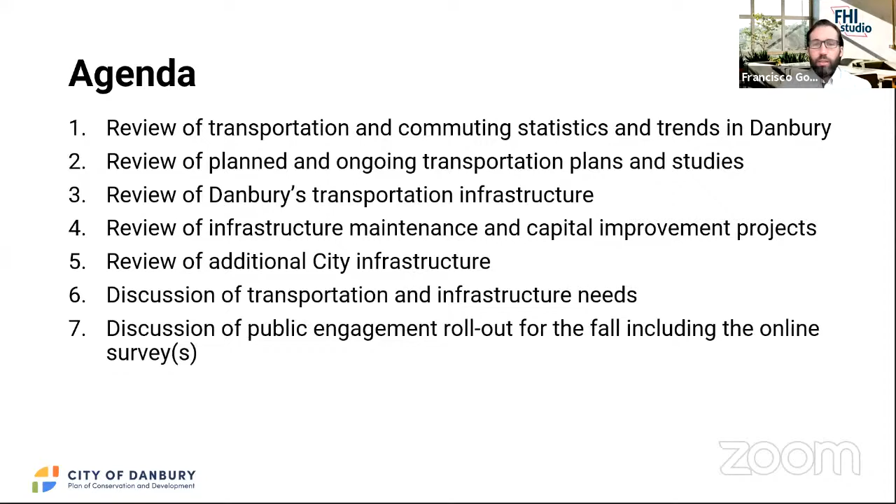And then Marcy will give us a brief overview of our thoughts about rolling out the public engagement campaign for this fall. All right, with that said, I'd like to turn it over to Parker now. The floor is yours. You'll excuse me if I chime in from time to time to make a comment I think should be added to the conversation, but it's yours. No worries, thank you Francisco.

So first, we want to take a look at very high level trends in traffic in Danbury. This is data from the American Community Survey, a U.S. Census product. Really big picture, 75% of residents drive to work, another 15% are carpooling. A big takeaway, I'm sure we're all aware of this, the roadway network in Danbury is very important, as well as the automobile. Only 4% use public transportation and only 2% walk to work.

How will COVID impact the commuting trends? You see the work-at-home slice that might increase, but that might be something we take a look at into the future.

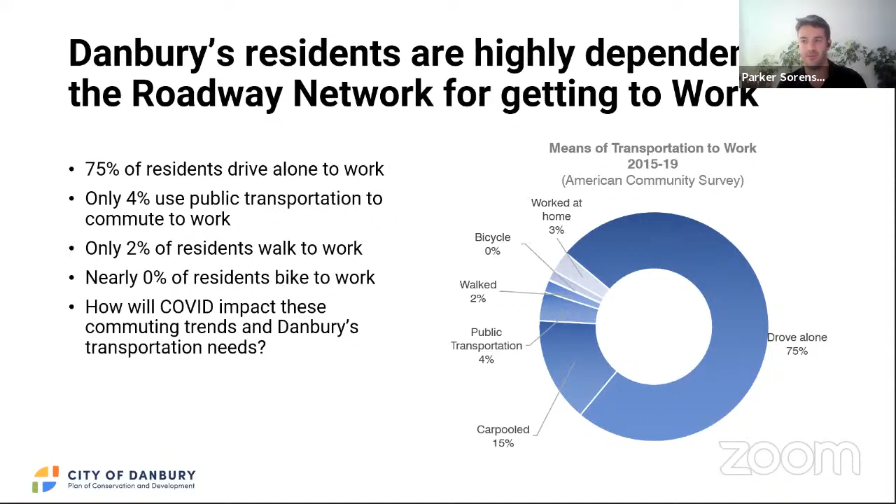We took a look at trends at select locations. These are tube counts or traffic counts that the Connecticut Department of Transportation conducts from time to time, usually every 3 years, in various locations in the city.

We took 12 locations throughout the city and 12 interchange ramp locations. Shown in blue are the non-highway locations, and you'll see that that's dipped a little bit, but been relatively stable since 2004. I just want to point out that that really mirrors a trend we see for a lot of similar communities around the state. I-84 traffic in Danbury has remained stable over that time.

We just want to point out what has changed since 2004, 2007. Navigation apps have popped up and allow people to avoid heavily trafficked routes that they might have otherwise been on before these navigation apps were prevalent. So these are really the major corridors in Danbury, shown on the blue line.

To add to what Parker was saying, just taking a look at the blue line would suggest that traffic is decreasing in Danbury. This is just an index, and what this data tells us is that it has decreased at those 12 locations.

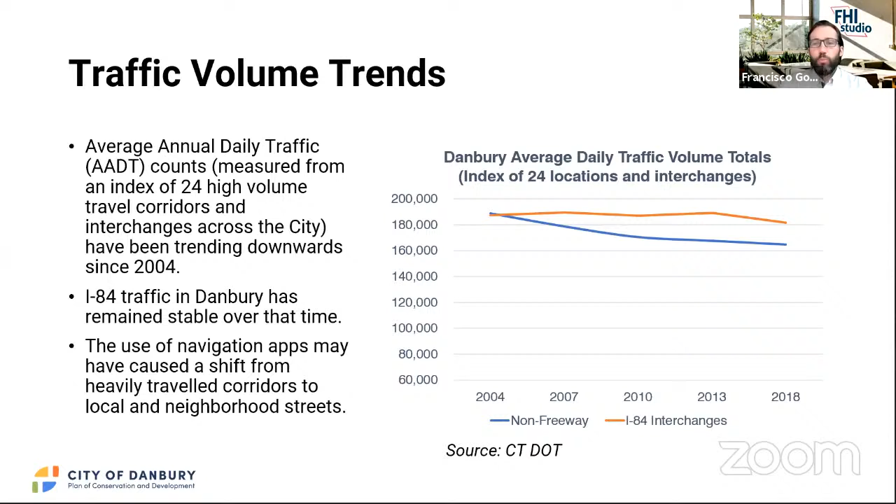I think what this graph is telling us, if anything, is that traffic in Danbury has remained probably pretty stable since 2004. It may have shifted around, and it may have shifted in time of day with more pronounced peaks, but you most likely haven't had an increase in volume throughout the city in aggregate over that period of time, even though the perception might be otherwise.

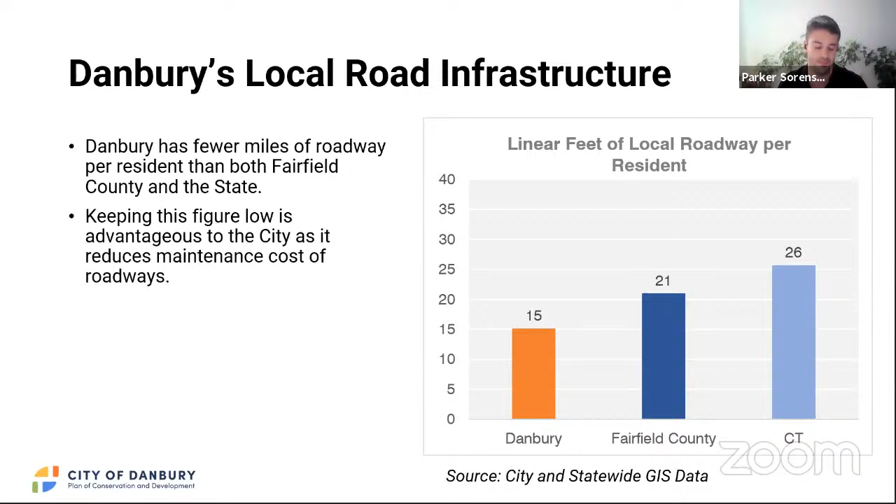We just want to note this - Francisco is going to talk more about the capital side later in this presentation. But obviously, keeping this lower number is advantageous to keeping costs lower for city residents. There might be, say, private roadways that were built over time for specific developments. Obviously, if the city starts to bring some of those under public ownership, that will impact this number in the upward direction, and have an impact on infrastructure budgets.

We took a look at safety between 2012 and 2020. About 3,000 incidents per year on average. Just a few highlights: around 2015, a couple things happened - you see this big increase. There was a change in the reporting system used by the state, so that is some of the increase. But we also want to note, in the mid 2010s, smartphones became really prevalent as well, so you see somewhat of an increase in general between 2013 and 2016.

In 2020, there's a sharp decrease. We all experienced this - less traffic resulted in less crashes.

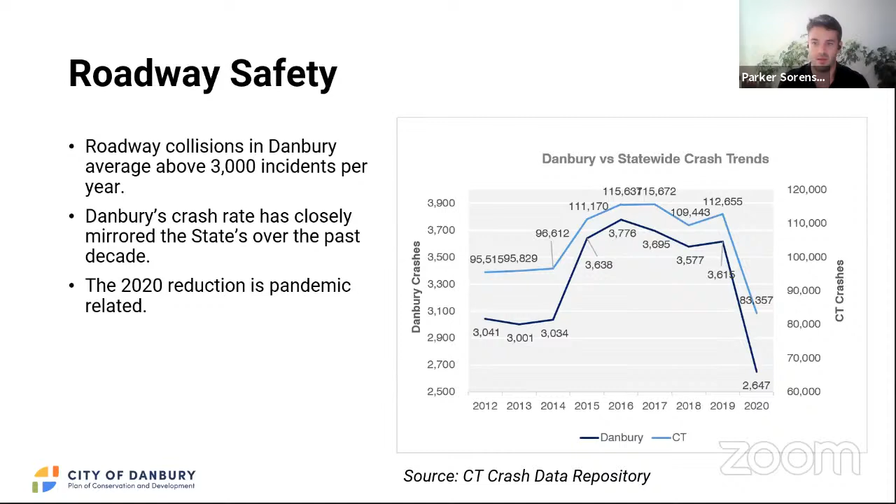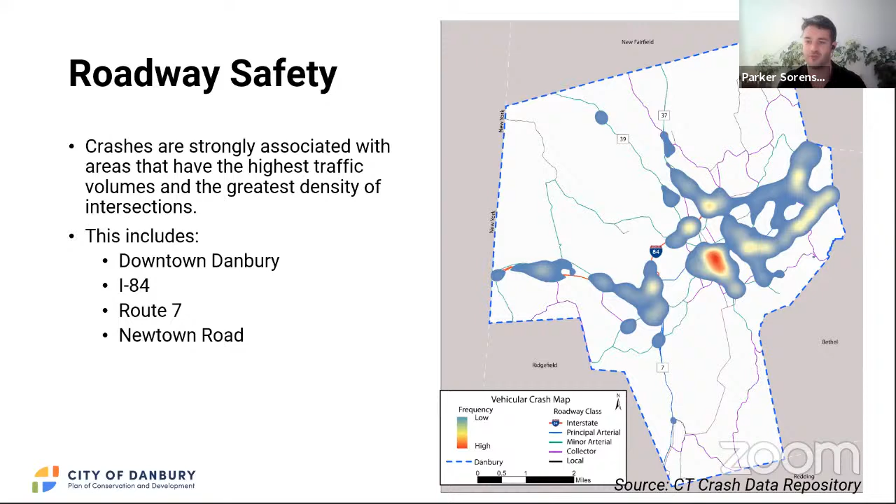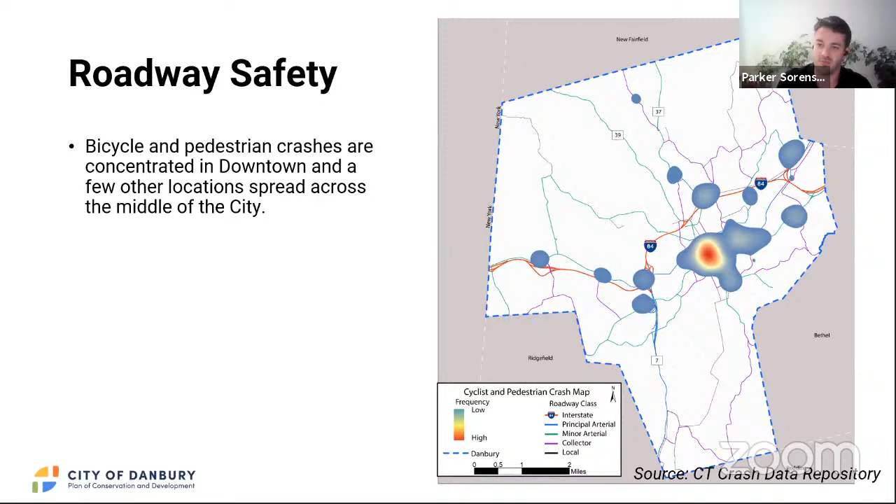The next slide shows specifically bicycle and pedestrian crashes. Those are really concentrated downtown. Not surprisingly, that's where our pedestrian activity is - that's where people are crossing the road, and that's where we're seeing the crashes.

So generally speaking, those are some of the trends we see in the state and national data sources. I want to take a look at the transportation plans and studies that we found relevant to this plan in the city of Danbury.

WestCog, the Regional Transportation Planning Agency, completed a regional safety plan in 2020, which included the city of Danbury and all WestCog member towns. At a high level, 3 high crash corridors in Danbury were identified - again, some of those major routes. 9 high crash intersections were identified, as well as specific countermeasures for 5 specific roadways at the bottom. So that's a really good resource that the city can use moving forward.

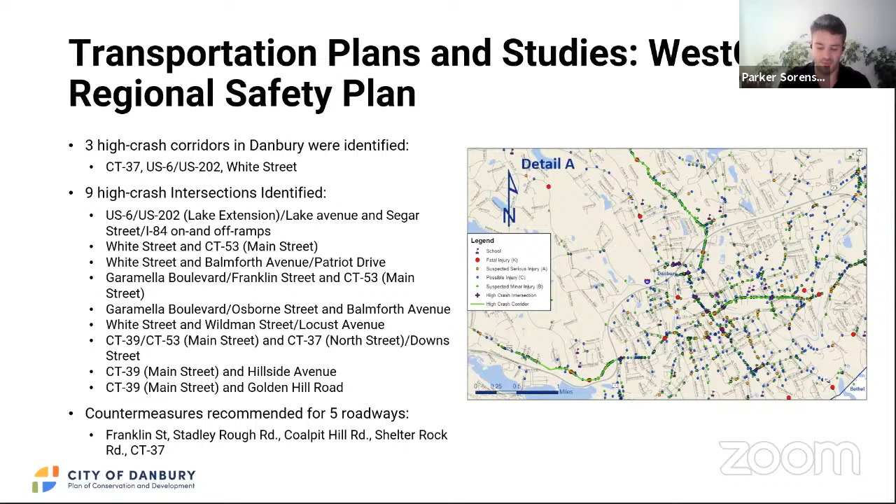I'm sure everyone in this meeting is aware of the I-84 Danbury project, which covers between exit 8 and the New York Connecticut state line.

Reducing some of those left exits, increasing the roadway width to 3 lanes throughout the city of Danbury, but also where possible, improving multimodal connections with commuter parking, bike-ped travel, especially under and over the highway, and any transit connections where possible. So that's a really major planning project that Marcy mentioned. She's on this call. That is ongoing, and the city should be paying attention to it moving forward.

And given that we have Marcy on the call, Marcy, can you give us just a 1-minute briefing on where the project is at in terms of its overall schedule?

You're on mute. In case you're speaking, you're on mute right now. Okay, maybe Marcy has me muted. All right, we'll keep going. I'm looking for her. I know she was off, probably got bumped out. Oh yeah, she's here. She's here, but okay. Yeah, all right, that's fine. That's fine, we can keep going.

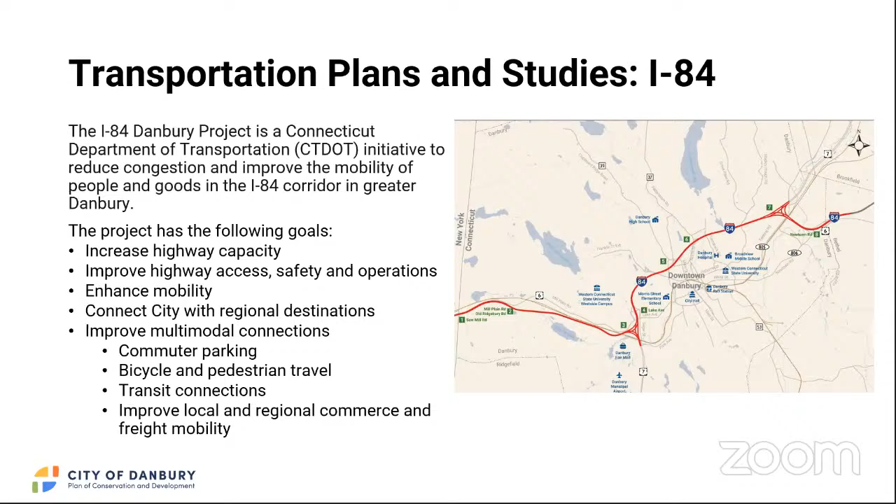Well, let's go to 37 because it's our next slide. And Marcy, seeing as how you're as familiar with the plan as anyone, why don't you give us just the broad overview about what it is?

All right, so Route 37 is a corridor study that goes from 84, the exit ramps at 6, all the way up to New Fairfield Center. The cities of Danbury and the town of New Fairfield came together, and they wanted to look at a couple of different things.

One is how to reduce congestion around certain interchanges, as well as what is the possibility and practicability of building a trail along the reservoir, the Margerie Lake Reservoir. So we looked at all of those things. The draft report is out, posted on the WestCog website.

At this point, all we have left to do to wrap up that study is present to both councils, the city of Danbury as well as the town of New Fairfield, which I expect will happen within the next 30 days. Okay, great, thank you.

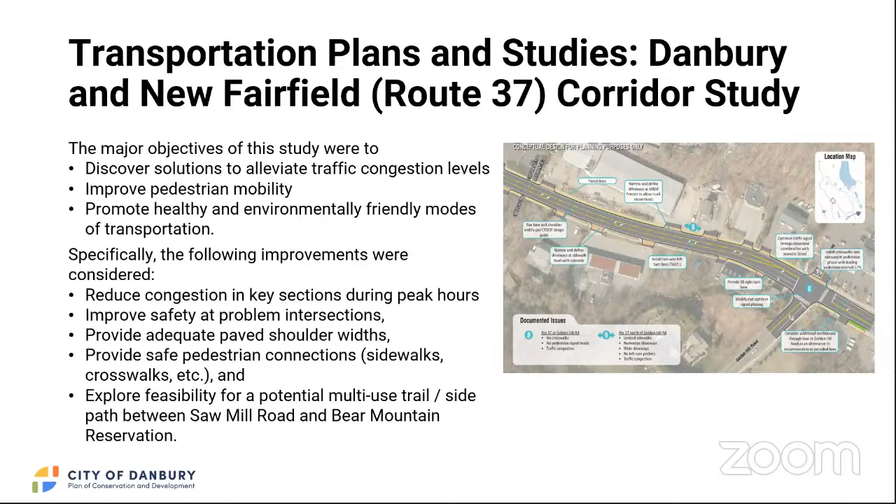And I-84 Danbury will go on for a while, I guess that's the only thing I have to add for that. Yeah, Sharon definitely impressed upon us the long range. And I apologize, I'm actually calling in now because my internet went out. Oh, okay, well, we're glad we didn't totally lose you.

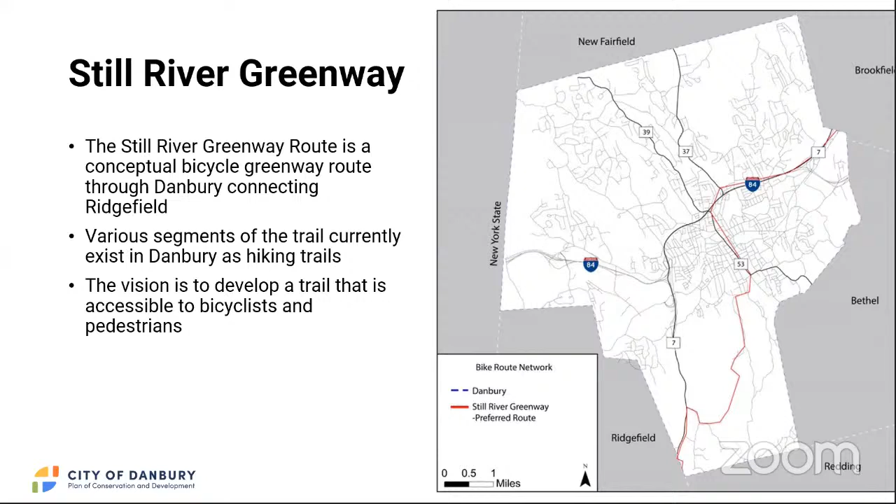Great, thank you, Sharon. Could I just ask a quick question on the previous slide? You had West Street listed. Is that, Lake Street, referring to Lake Avenue and Lake Avenue Extension? Yes, I think it is. It's just a typo. West Street and Lake Avenue Extension. Okay, thanks.

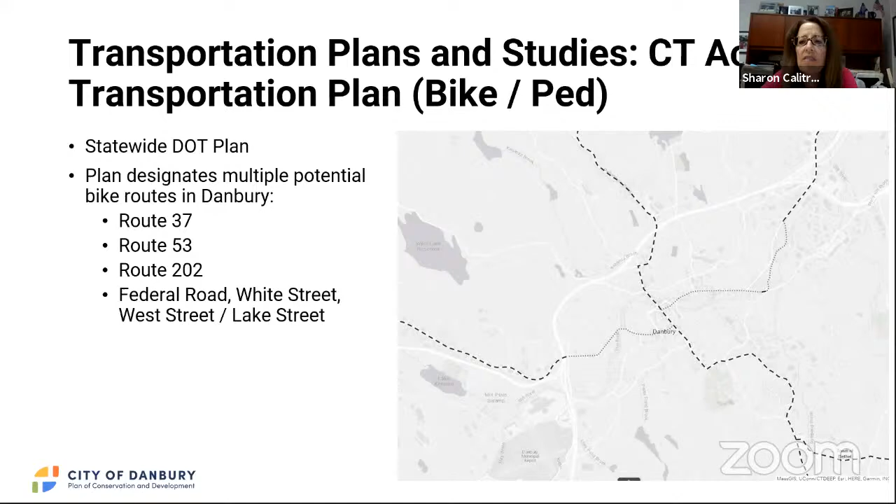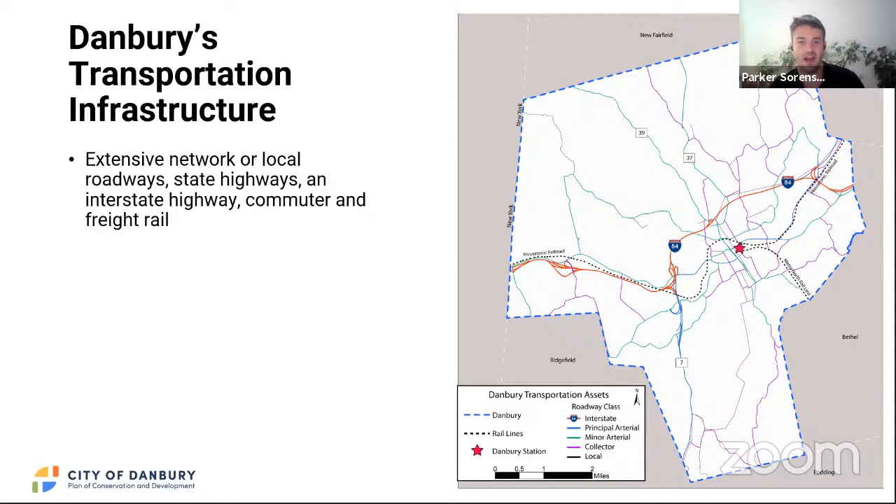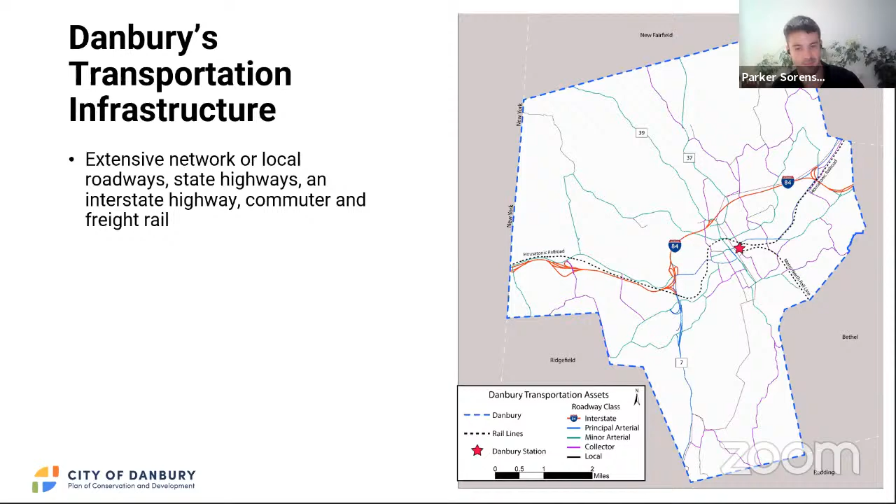Thank you. All right, Parker, back to you. So overall, specifically taking a look at the actual infrastructure that the city of Danbury maintains, there's an extensive network of local roadways, state highways, interstate highways, Route 84, Route 7, as well as commuter and freight rail, specifically commuter rail Metro North. We'll take a look at each of those modes in the next few slides.

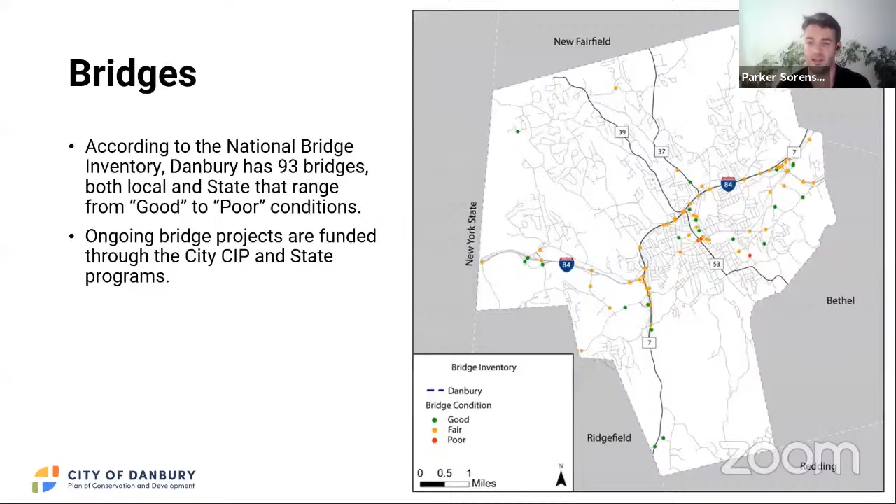Railroads: railroad corridors include the Housatonic Railroad and the Metro North Railroad. Most of us should be familiar with the Metro North branch line service that currently terminates in downtown Danbury, providing service to New York City. I want to note, and this has been in the news a lot recently, there's currently a feasibility study for the potential extension of Metro North service of some sort from New York, Brewster area probably, to the Danbury station. That's just a feasibility study being conducted at this time, and it's ongoing.

Yeah, I'll just jump in for a time frame and frame of reference. As many of you know, this was discussed. We focused heavily on the TOD, the Downtown Danbury TOD plan on transportation, and one of the ideas that came out of that was to promote this east-west connection.

For the railroad, using the old Maybrook line or Housatonic line easement area, NYMTC, the New York Metropolitan Transportation Council, along with Putnam County, funded a feasibility study that we participated in the scoping of, to determine the feasibility and ridership interest and levels.

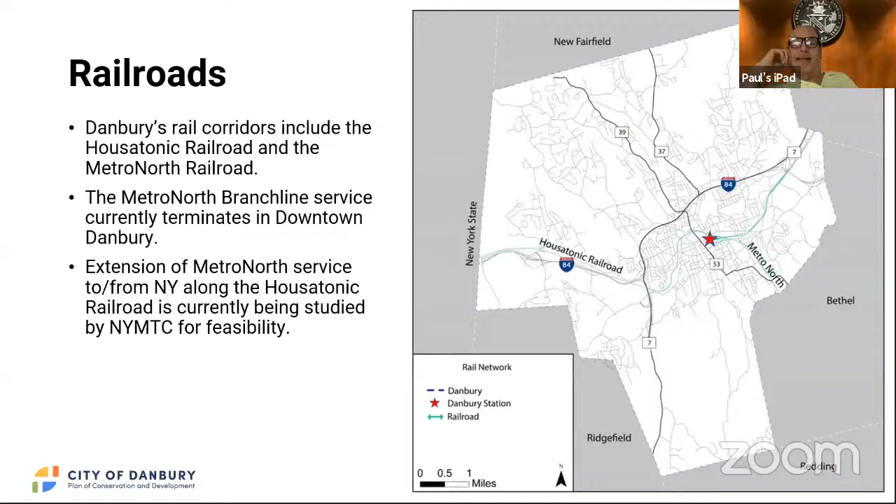They're not touching the existing tracks, but the guys doing this were a little nonplussed that the trail could hold both a bike path and a commuter railroad. But I said, well, I'm sure that they know that. I'm not sure that Danbury knows this. So yeah, we know. I'm passing it along. Okay. Yeah, thank you.

Yeah, we do know, up until the Connecticut line that's been occurring. The discussions with them, I don't want to get off target, we can have offline discussions about this, but they wanted to kind of do the combination, and their concern was people next to their active rail line. So it's something we have to look into.

In a no-train situation, it's a perfect opportunity for a trail. But we want to be able to try to make that connection and provide a trail, whether it's adjacent to it, nearby, excess right of way, that all has to be figured out. But yeah, we're familiar with it. Okay, thank you.

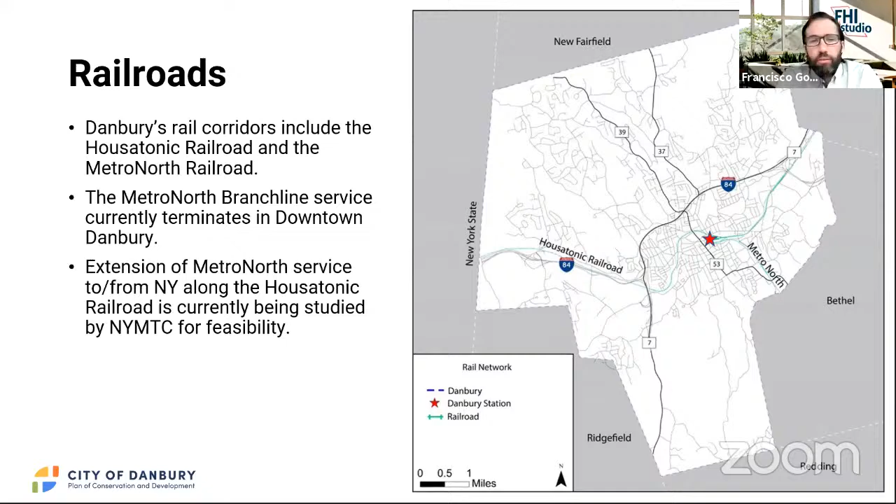Okay, great. Well, let's move on to the next slide, talk about bus transit. So Hart Transit in the city of Danbury operates 7 routes, roughly highlighted to the right, and you can see it's kind of radial from what is called the Pulse Point in downtown Danbury. I'm sure many are aware.

Recently, like other transit systems, the pandemic has had a pretty significant impact on ridership of the HART transit system. However, ridership is expected to rebound. Funding challenges continue to be a challenge moving forward. And the Pulse Point itself, with the 7 routes coming into a single location downtown, there's been ongoing discussions to relocate this Pulse Point closer to the train station to make that multimodal connection a little easier. Definitely an asset we want to keep track of.

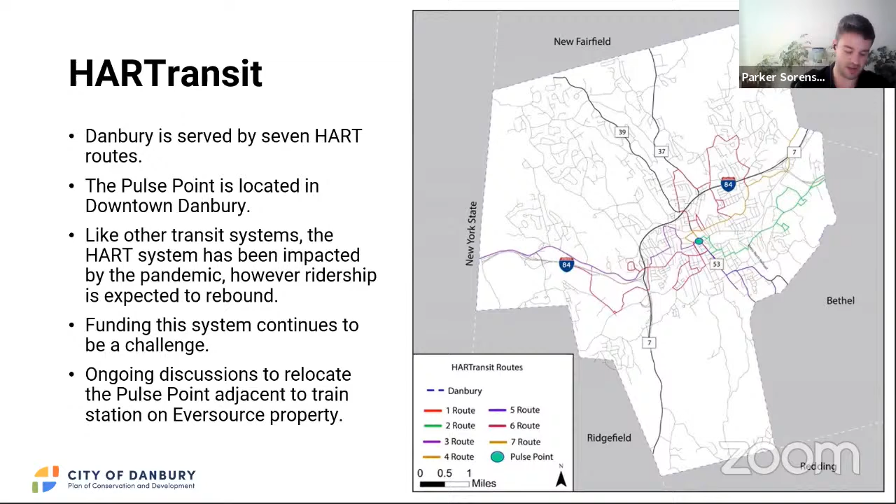Then finally, we want to talk a little bit about bike ped. On the pedestrian side, we have a sidewalk network highlighted in this magenta color. You can see that's really concentrated in downtown Danbury itself, with some significant gaps as you get outside of downtown. Surrounding neighborhoods have little infrastructure at all. However, the city's zoning regulations have been supporting the development of new sidewalks with projects by requiring their construction, etc.

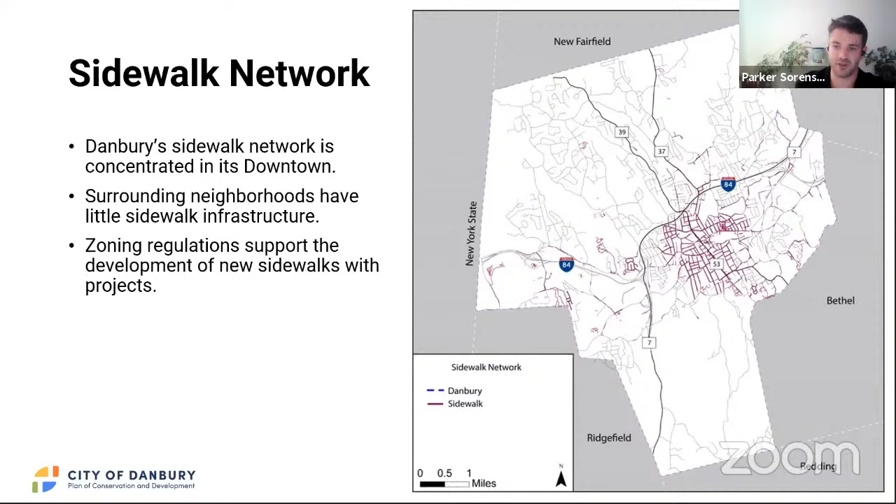Then lastly, bicycle infrastructure within the city. There's very little currently, no bike lanes, shared use paths, etc. However, note that this is the 2012 Greater Danbury Regional Bike Plan. It indicates that the greatest area of bicycling demand is found in the downtown Danbury area, as well as east-west along the I-84 corridor to Bethel, Brookfield, etc. So you'll see that highlighted in the red color. So no biking facilities yet, but definitely something that there might be demand for in the future. Thank you.

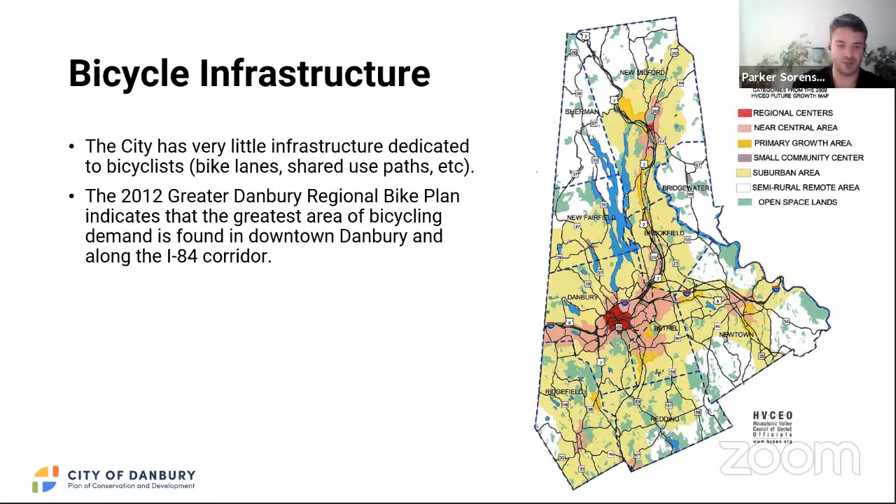All right, I'd like to talk about all of the work that is going on related to transportation infrastructure, whether that be maintenance work or work that is funded through the current capital improvement budget. I've got a bunch of projects here. I'm not going to read them all. We wanted to get them into the presentation so that you could review on your own if you're interested. I think we want to impress upon you, or remind you, of all the work that does go on a year-to-year basis.

By example, we have roadway and sidewalk work with a number of projects that are funded, being planned, or under construction at the moment. There's a wide array here, so I've got 5 or 6 slides to this effect. I'd like to turn it over to Tim Nolan, if you want to talk at all about the kind of work that you folks do on an annual basis, what you're working on now, and what is lined up in the near future.

City of Danbury Public Works Department controls all of the properties owned by the City of Danbury. So we have superintendents that look after facilities, the roadways, the parks, equipment maintenance, the forestry department, and a superintendent that looks after our utilities, both sewer and water, as well as a construction manager superintendent that does major capital improvement projects. So everything owned by the City of Danbury, the Public Works Department maintains.

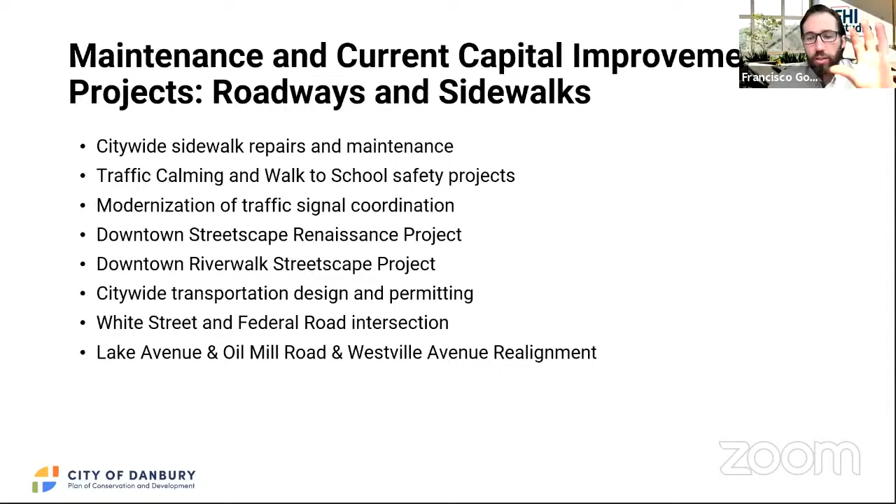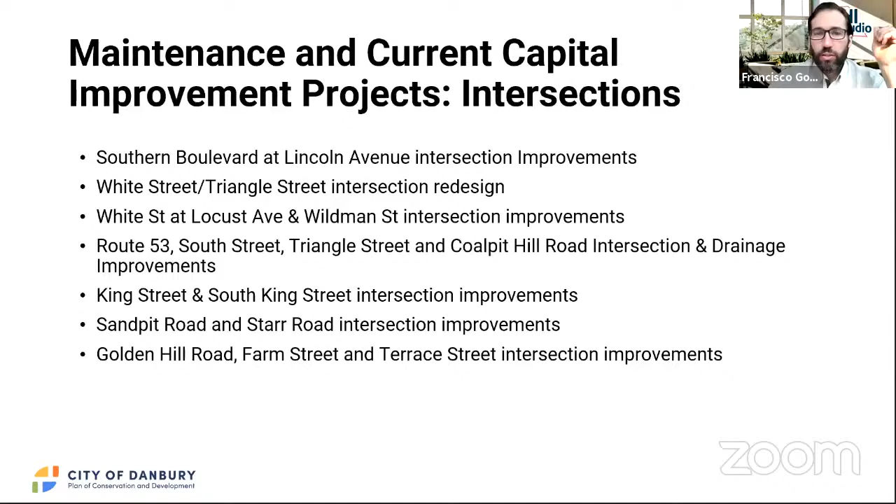So a number of roadway and sidewalk projects across the city, intersection improvements, whether it be for safety, for operations, or any other particular needs. A number of intersections are targeted on the capital improvement list. It goes on as 2 pages of intersections alone, as well as railroad crossing improvements at, I believe, more than one location.

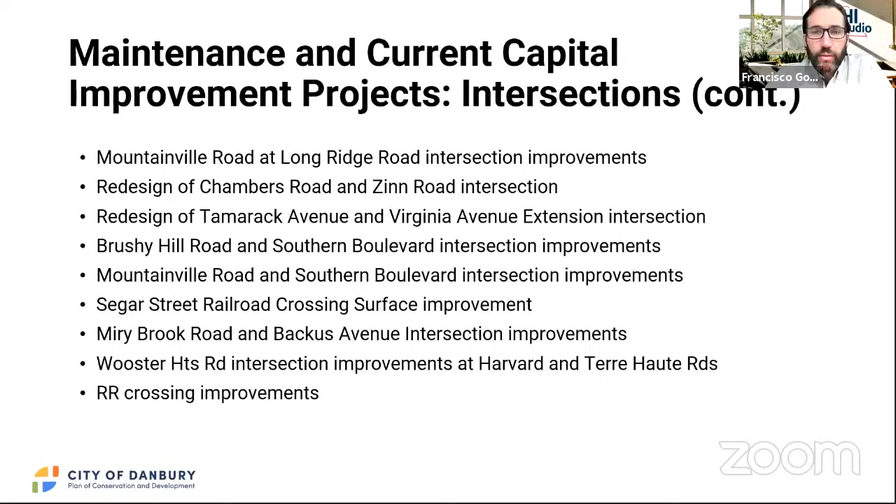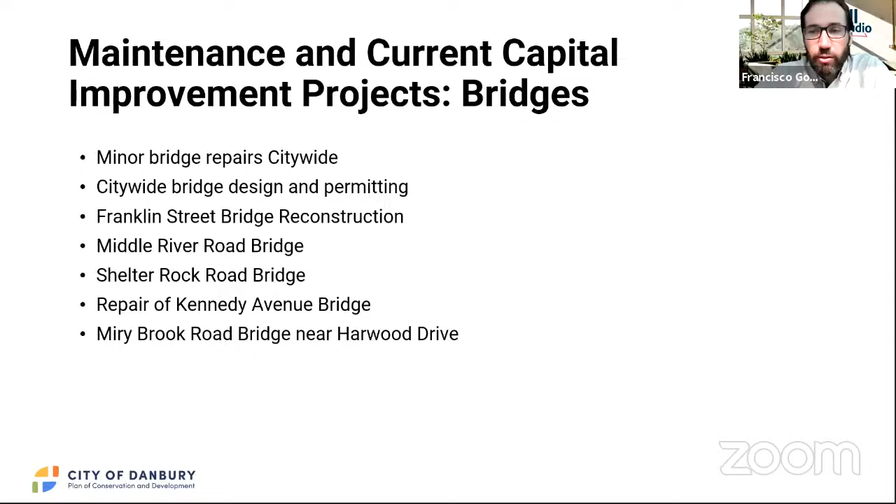Bridge improvements, we talked a little bit about this earlier. There are a number of bridges that are in the process of repair or are funded for repair or planned for repair.

Related to that somewhat is drainage and stormwater management. This city is mandated by the state to comply with an MS4 stormwater permit. The city conducted an initial study and plan as to how they're going to comply. It has to provide annual reports with respect to compliance. This is a pretty heavy lift with respect to reporting, and it does compel the city to do certain things to really try to minimize the amount of runoff directly into water bodies that is untreated in any way, and a bunch of other measures the city is responsible for doing, including communicating with residents to help minimize the amount of waste that gets into the stormwater system. So that's ongoing, as well as specific improvements to drainage basins and channels across the city.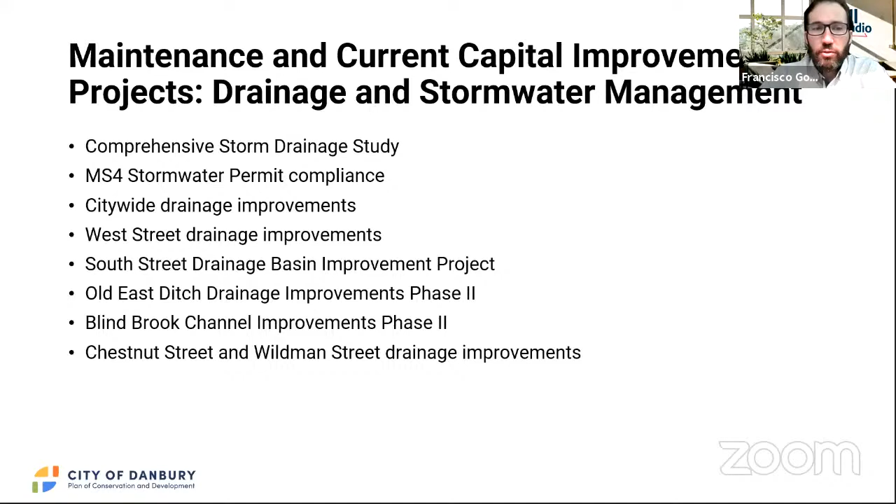And we pulled out one capital improvement project just to highlight because of its prominence. That would be the Main Street Streetscape project. Sharon, can you talk just a little bit about this project, where it's at? Sure. So many of you know, we are undertaking phase 1 of the downtown Danbury Streetscape Renaissance project.

It was funded through the CIP, through various city bonds and grants that we got. The total cost is about $12 million. Phase 1 is around the Danbury Green and the streets adjacent to it. So again, you know, the sidewalks were reconstructed 30 years ago, and many of the trees are stressed and at the end of their lifespan.

You know, the sidewalks were heaving. There were asphalt patches in them. And so, you know, we came up with a plan and a program, and we were fortunate enough to apply for some significant grant money from the state to be able to introduce a new design.

We split the project into 2 phases. So as I said, phase 1, we went out to bid just after the beginning of this year. The bid was awarded. We started construction in May, I guess, and that is underway. If you go down along the ice rink, you'll see the contractor there, being supervised by Public Works, with our involvement as well.

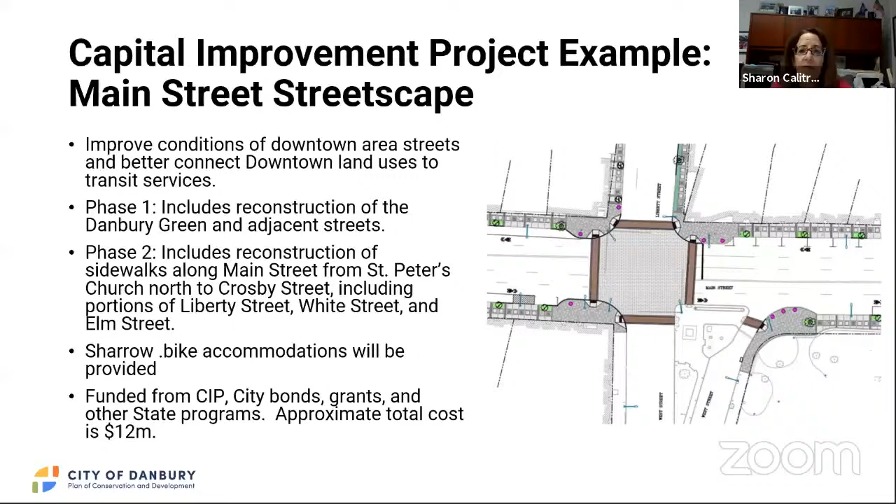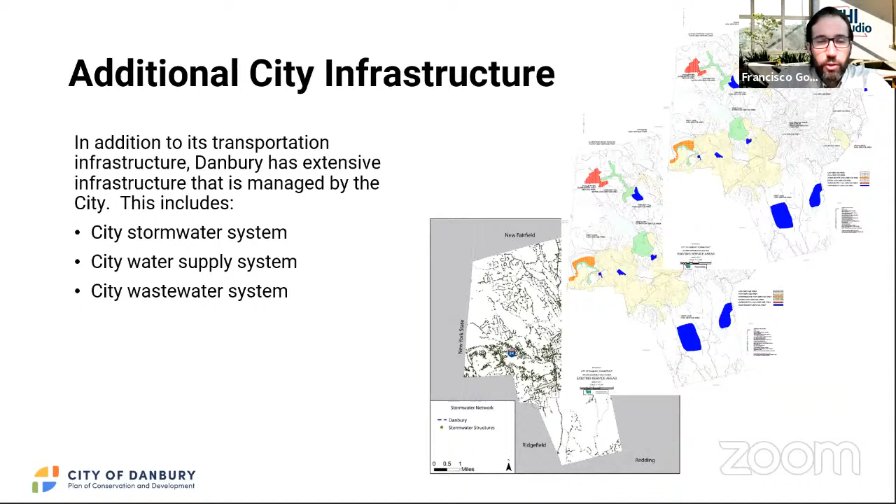As I mentioned earlier, in addition to the transportation infrastructure, the city manages the stormwater system, the water supply system, and the wastewater system, all of which closely follow the road infrastructure, located within or under your roads. A quick overview of the stormwater infrastructure: each dot is a small piece of infrastructure located throughout the city, showing how extensive that network is. To maintain compliance with its stormwater permit and the state, the city employs low impact development, or LID, measures to help mitigate stormwater runoff impacts. That's under consideration and already being employed, and it's an ongoing challenge to better manage and maintain that system.

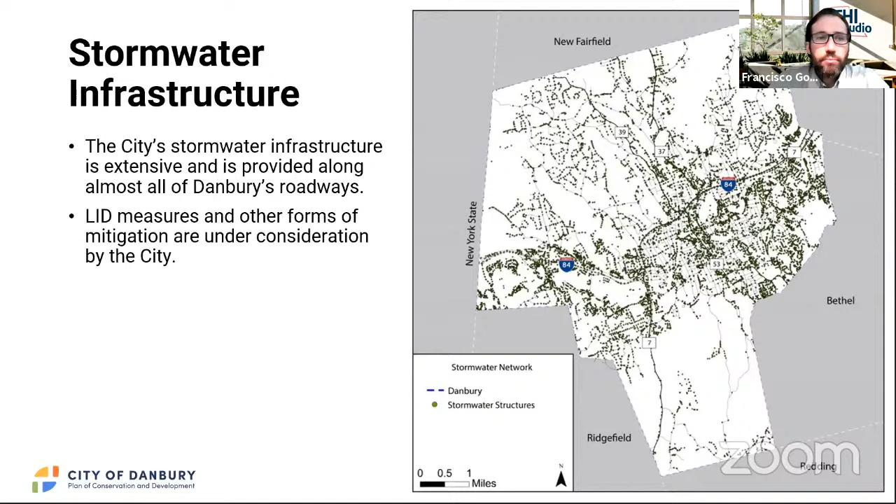Your water distribution system - there aren't many municipalities in Connecticut that manage their own water supply. It's not unique to Danbury, but many places have either a private supplier or a separate district established to manage water. The city manages, distributes, and maintains most of the water throughout the city. There are some private or privately managed systems - Aquarion manages some smaller systems across the city, along with some community-based water systems and properties with their own wells. But most of the city is supplied with drinking water by the city's system, which includes reservoirs, wells, water purification treatment plants, and all the pipe and water main to get it there.

The map on the right indicates areas that are lower and higher in elevation, so those colors don't mean different types of water service, but rather elevations. But I think the point to impress upon you is just how much of this city is supplied by water that is maintained and managed by the city itself and by the utility department.

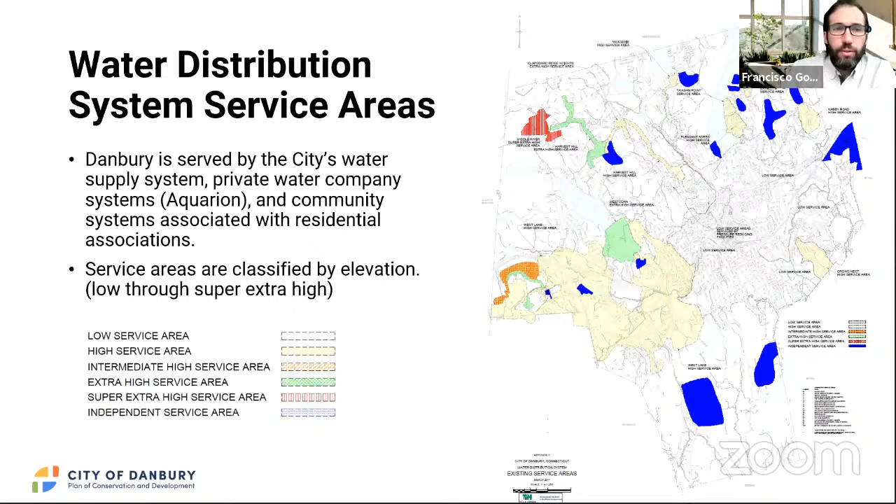Some stats about that: 6.5 million gallons of water per day are distributed through the system. There are 8 reservoirs, a well site, 2 water treatment plants, pump stations, storage tanks, and 200 miles of water pipe as the main, not even including laterals to homes. There are 2,100 fire hydrants connected to that system, and it serves 65,000 people, or 76% of the city's population, about three-quarters.

Francisco, I think Joel has a question. Yeah, Joel, go ahead, I'll answer it for you if I can. All right, it's not so much a question as an observation.

That the city owns its own water supply didn't happen by accident. We've seen a lot of other municipalities sell their water supplies off to private management companies, some with disastrous results. We had the opportunity to do that too some years ago, and I think wisely passed.

The ability of Danbury to manage its own water resource is one of the key things. It helps Danbury become a managed growth city. I would hope that out of this report, there's not even a hint that we should consider selling off something as precious as our water resource.

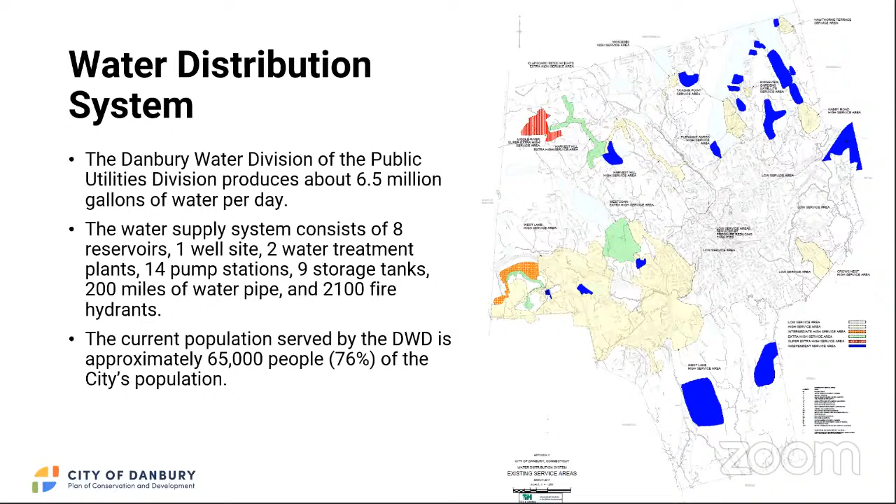I think, let me just see, Candace had a comment I think, but she may have gotten bugged out. Are you there? Oh, there she is. Oh, maybe not. Candace, did you want to say something? I keep losing and then you, Sharon. Yep, gotcha. You're in. Yeah, your connection's not very good. Oh no, I'm okay. It was answered, thank you. All right, well we're good, we keep going.

And then, of course, if you're supplying the city with water, you need to carry the wastewater away, and that's the other half of this system. About half the city is served by the city sewer service. All of those shaded areas on the map are areas that are within the city's sewer shed.

Let me explain that a little bit. All of those shaded areas, those kind of grayish brown colors, are areas where the city either currently provides service to properties and roads in that area, or has a policy to provide it if service needs to be extended to a particular road or property within those areas.

So that's pretty much this map. We'll revisit this map, as well as the public water supply map and other maps, later in the process as we develop Danbury's future land use map, which is a very important component of the POCD and of state requirement. As we think about areas where growth should be supported or encouraged with policies, that'll be very much tied to the infrastructure that's available and what's planned and what the city can and is interested in continuing to maintain.

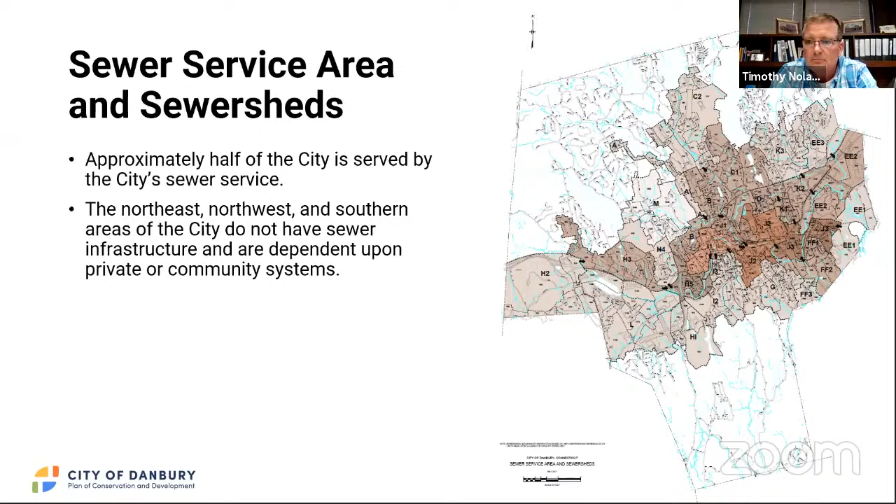Okay. Yeah, and I mean, Cornwall just got a $3 million grant—West Cornwall, where the covered bridges and all that stuff—for a new sewer plant. We could use $3 million. Tim will tell you, if we got $3 million, we could hook up a lot of people.

And I think we want that stuff being treated. We don't want it leaching into the groundwater in the city. It's really important, but we're at a crossroads. We just can't get these hookups.

I've talked to people in the 6th, which is really hilly, and they'll be complaining—yeah, they want to put a pump station on my front lawn. I'm not going to let them do that. I'm going to listen to it all night long, and it's going to leak and all this other stuff. Yeah, okay, we get it. We're not going to do it. And that's where it stays.

Okay. Well, I mean, these are issues that are directly related to a plan of conservation and development. I mean, they couldn't be more central. So thanks for mentioning that.

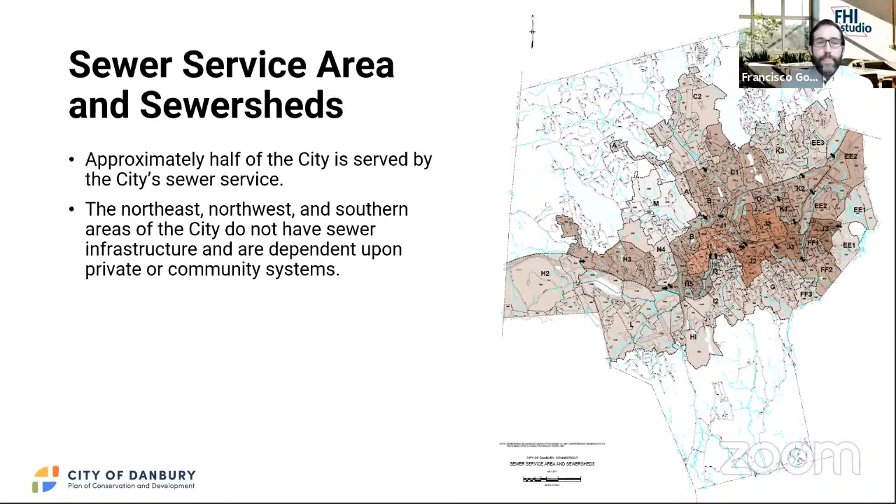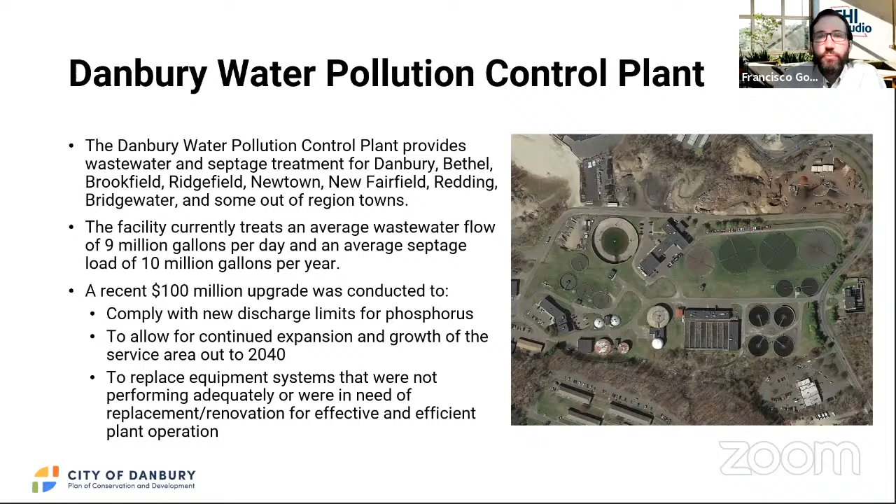All right, so we just did a lot of talking. I know we've had a few people chime in as we went along here, but are there any outstanding transportation or infrastructure issues or needs that you feel we didn't discuss this afternoon, or that the plan should really focus on and delve into? Anything at all that comes to mind?

Yeah, Francisco, if I may. Yeah, please do, Fred. Go ahead.

Yeah, the information that Sam gave, considering the supposedly downward drift of car traveling in the city, I'd like to know really how they came about that, because I've been here all my life, and I got to say, guys, I haven't seen any improvement in the amount of traffic that we have in the city right now. It's really getting crazy. More and more out-of-state cars, New York, Massachusetts, all over the place, New Jersey. A lot more 18-wheelers going through even on the side streets where I am in the southern part of the city, day in and day out, going back and forth.

I figured it's become a cutoff for them to get either from 7 and 84 or to 7 and 84, or the town of Bethel or Ridgefield. I really think that we need to take a much better look at what they came up with those figures.